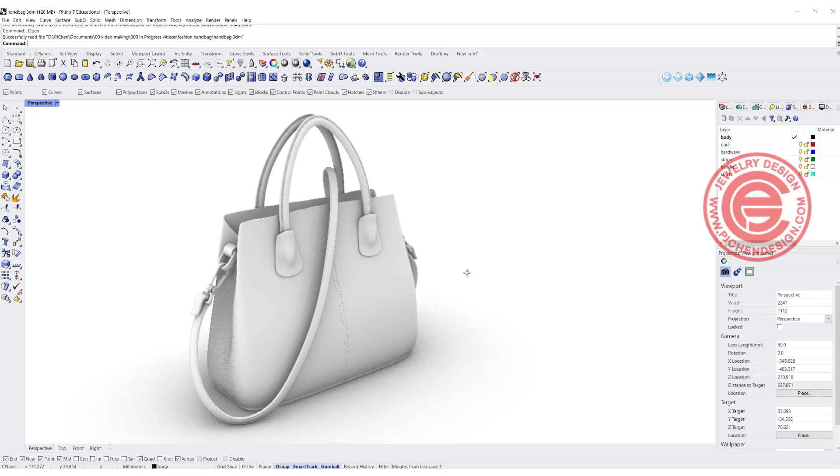This tutorial is going to be too long for one video, so it's going to be a part 1 and part 2. For part 1, today we are going to talk about how to make this main body and how to make this pad to go with it to hold the handle. At the end, we are going to talk about the handle. In the next video, we're gonna talk about this strap and also the hardware to go with it. And finally, we're gonna talk about how to make those stitches.

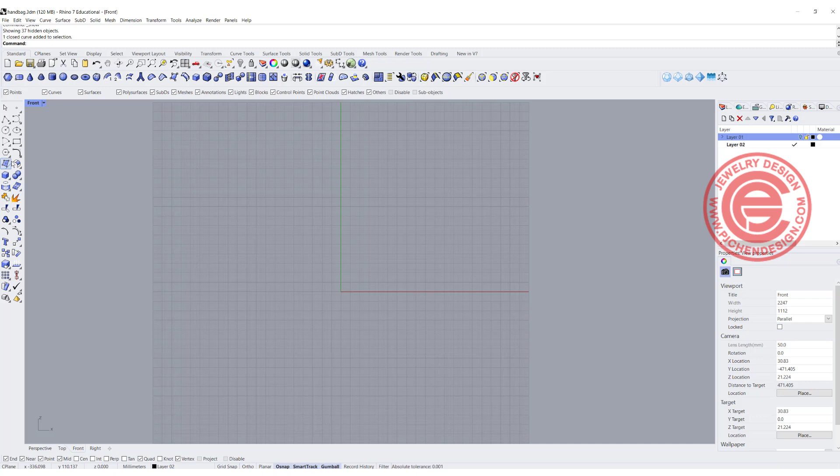So we're starting from scratch. You can design any shape and size that you want. Since this is just for the presentation, for rendering purposes, I don't actually design in the true size, so I'm just roughly going by aesthetic.

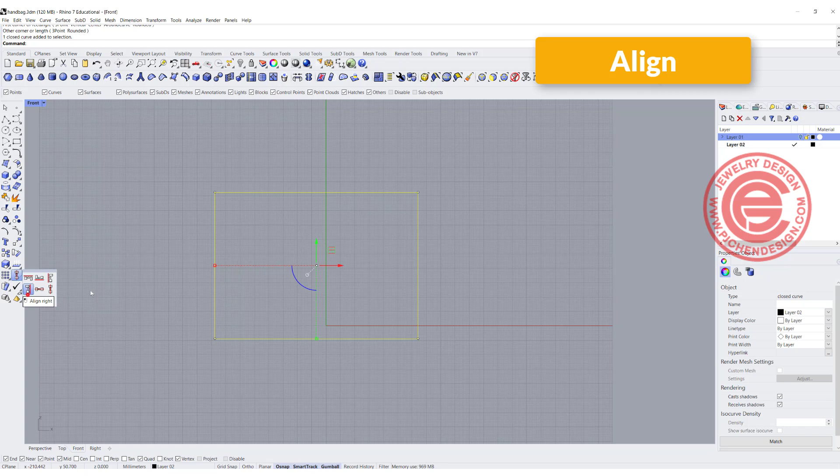Now once I draw roughly the size that I want, I'm going to move them back to the center, and I'm gonna use the align tool to align to the center, and I will have something like this. Okay, so this is roughly the size I'm going to go with. In fact, I want the bottom snapping to 0, so we get something like this.

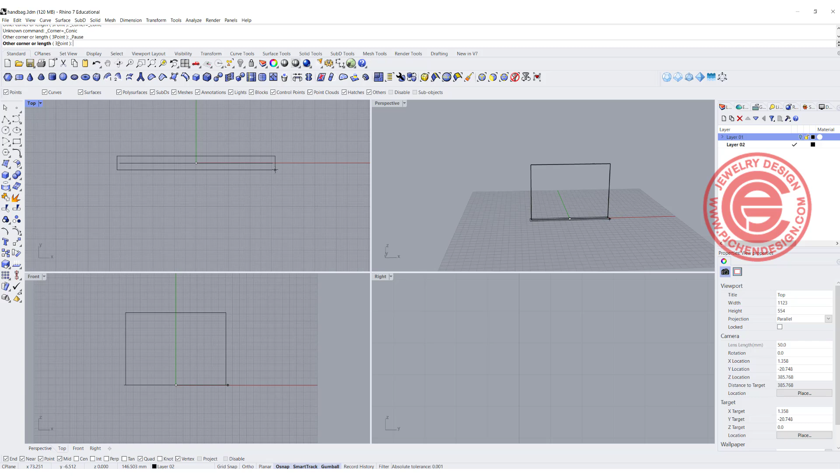Now coming into the top view, I'm going to decide what the bottom of the bag looks like. So I'm going to use the center as 0 and come out, snapping into those points, and come back like this, right? So then this is the bottom of the shape.

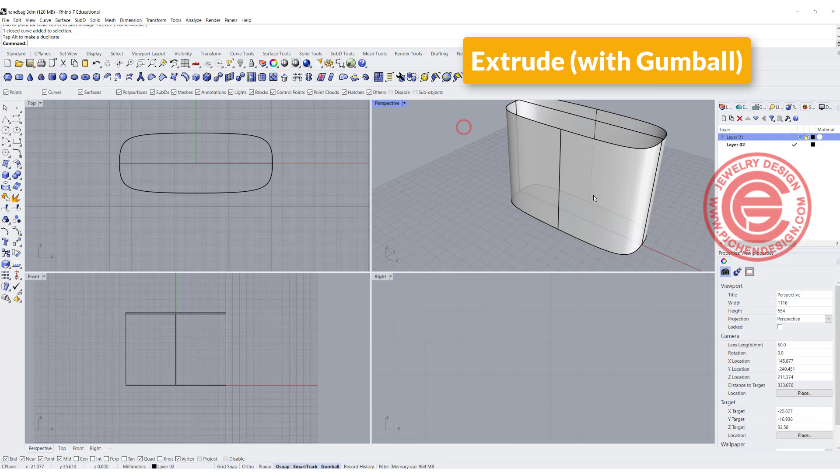Now on the top, I need this one going up, so I'm going to extrude it to whatever I think the height is going to be. So then we'll get this really boxy looking surface. Now with this surface, we need a lot more editing. If you turn on the control points, you're gonna notice that there's not much you can do to edit this box. So the first thing we need to do is rebuild this surface.

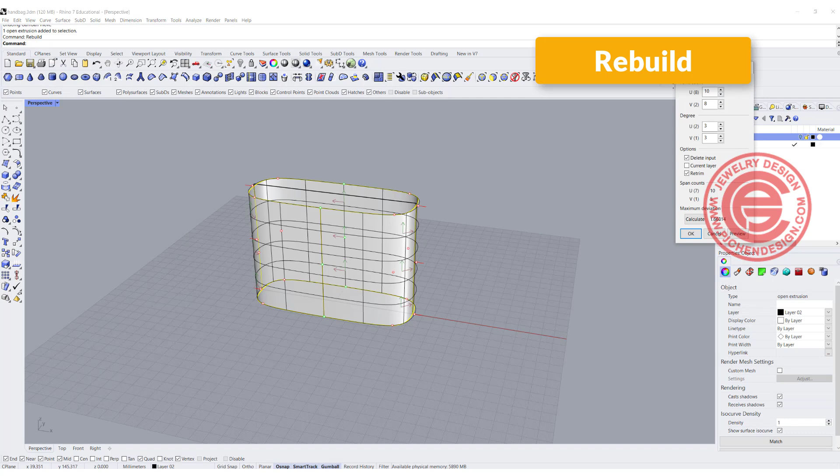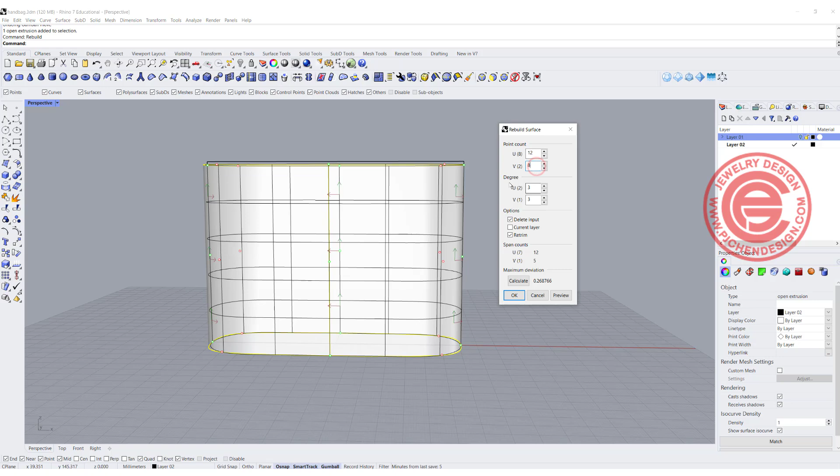How many points you need really depends on what you're looking for. The more points you have, the more control points you can edit later on. So I'm going to keep this as 12 over here, and for the height I actually don't need that many, so 8 will be okay, but the degree must be 3, otherwise you won't get a really good curvature on the side. All right, so now we have this on the body.

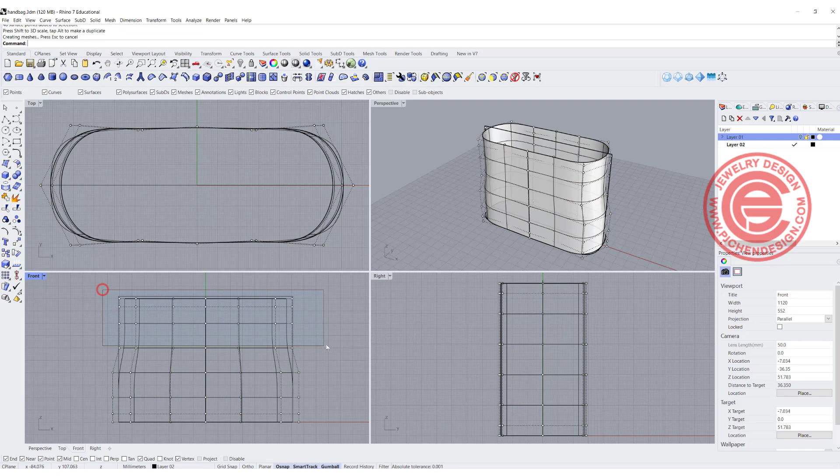I would like to start tweaking them, so let's take a look at all 4 views, and I like to have them in wireframe mode, so it's easier for me to edit. Now I want to start tweaking and moving those back, and if you see what I'm moving, I'm kind of moving row by row like this. And I'm going to delete this one. That was just for reference, and I want them to come back like this. So you tweak it the way that you want. In my front view, I want the bottom to be a little bit fatter.

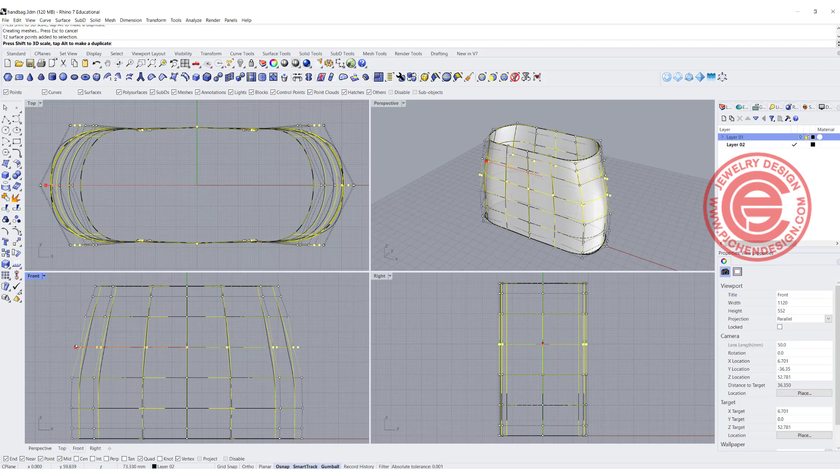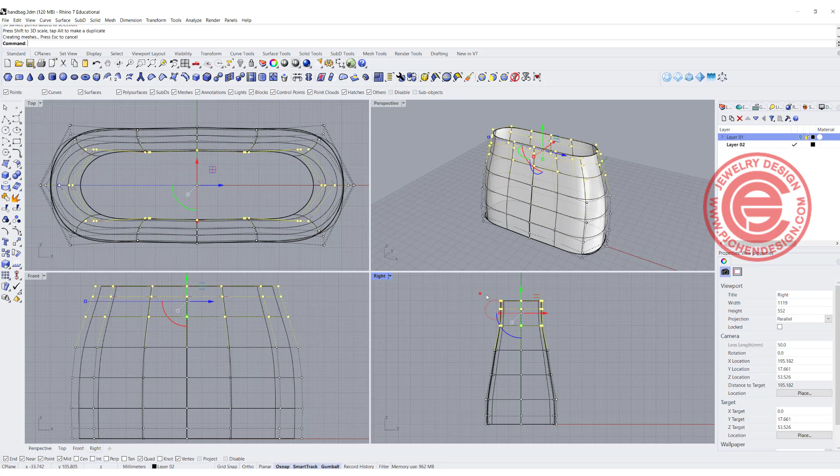And then on the side too, I do want to have those coming in. It doesn't have to be symmetrical, but I usually prefer symmetrical. It just looks nicer, because as human beings we tend to look at things symmetrically anyway. So I like it to move on both sides. And again, you can go back and fine tune it into the shape that you like. Maybe you do not want it to come in that much. So this is something that you can do. So far what I've been doing is just 1D scale.

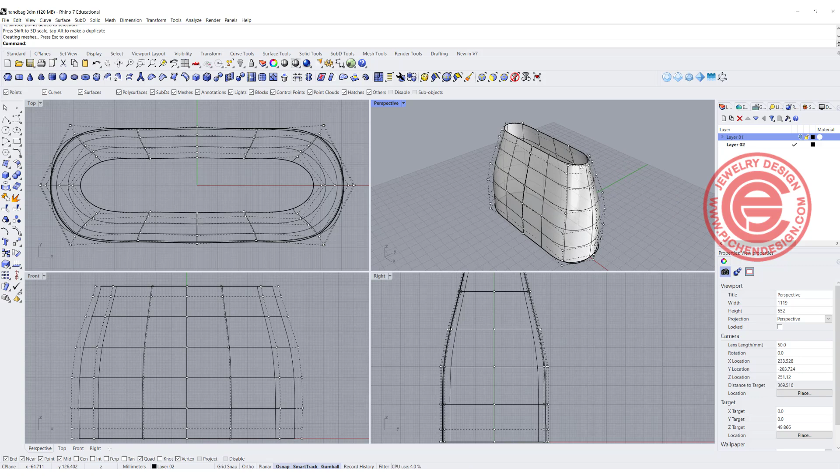All right, so I need to have this kind of caving in here. So let's say I only pick up those 2 and 1D scale in, and all I get is something like this, right? So it's caving there, but I do not want it to move the top in anymore. So I actually need a few lines there to help me. So maybe pull out this just a little bit. I think it's caving way too much.

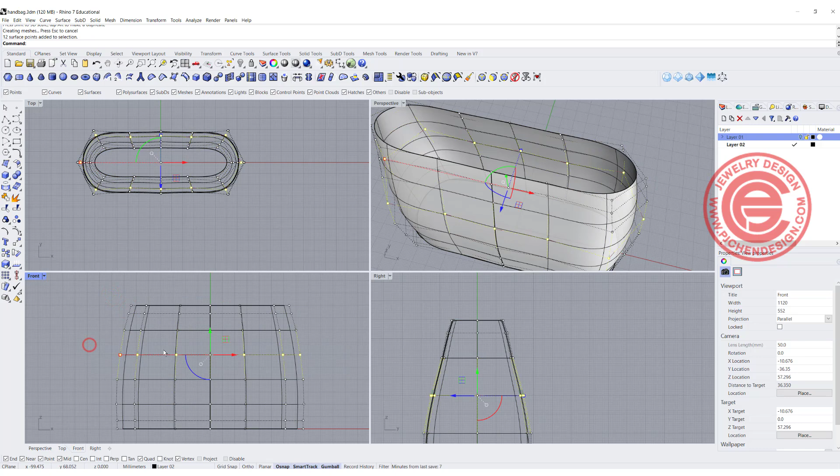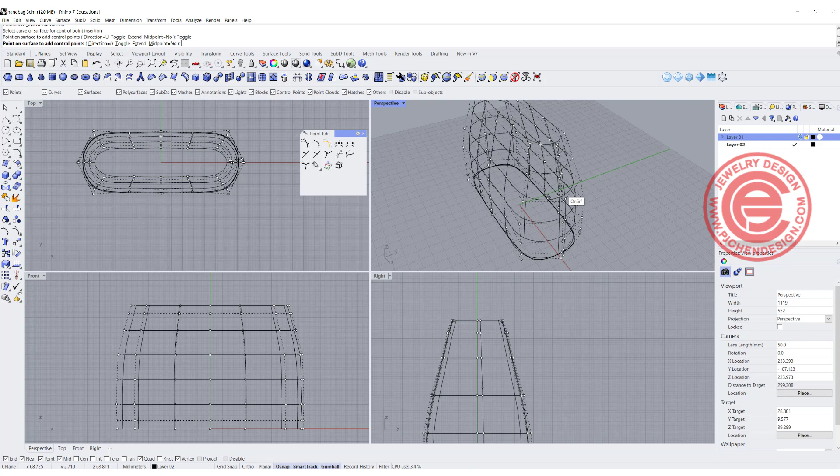And I actually wanted to add some lines there. So let me go ahead and come here for our control point. And you do have this one, it's called Insert a Control Point. So I'm gonna select this surface and I wanted to toggle so they will be right in this direction. And right here I want to add in a line and add another line there. The same thing I wanted to do on the other side, one line here, one line here. So I'm adding that control point there.

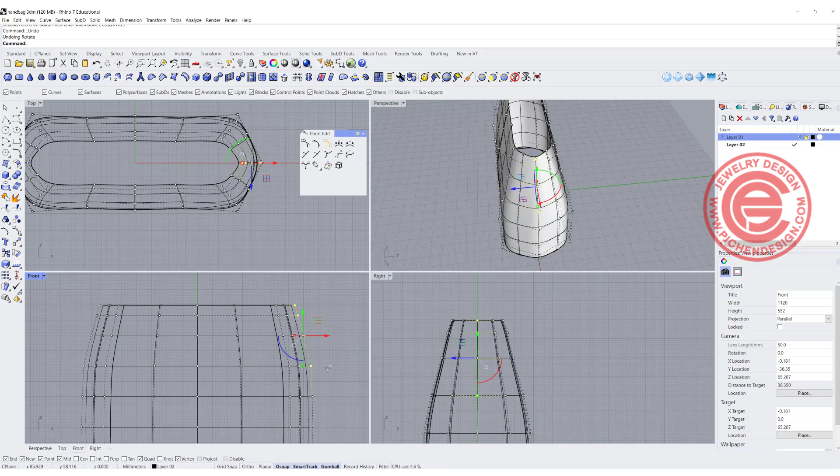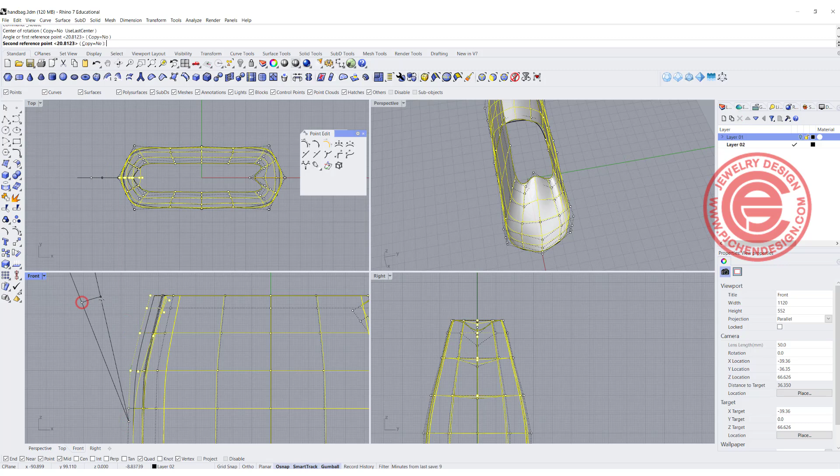Now if I pick up those 3 points on the top and I want to rotate it, coming in like this, you're kind of seeing it's kind of pinched in there, but it's a smoother pinch instead of really big, right? So I'm going to pick up those points here, and again I want to use the rotate tool, and it's kind of a pinch in like that. All right, so then that gives us a little pinch. I mean, it's up to you, you can make them pinch more if you want to.

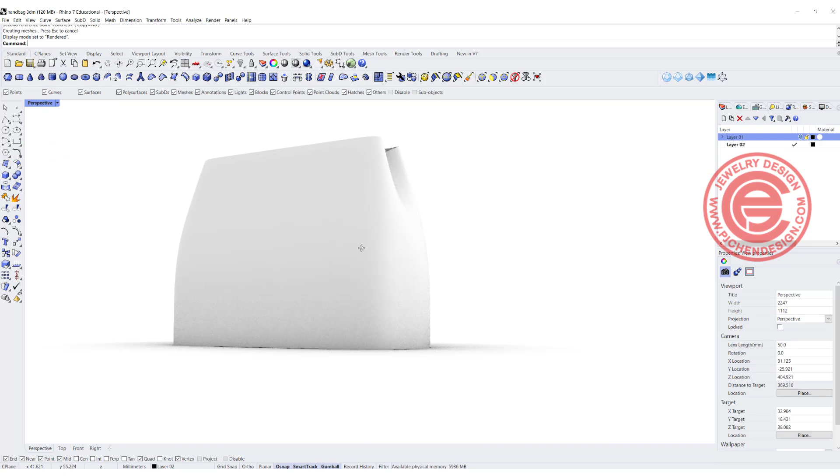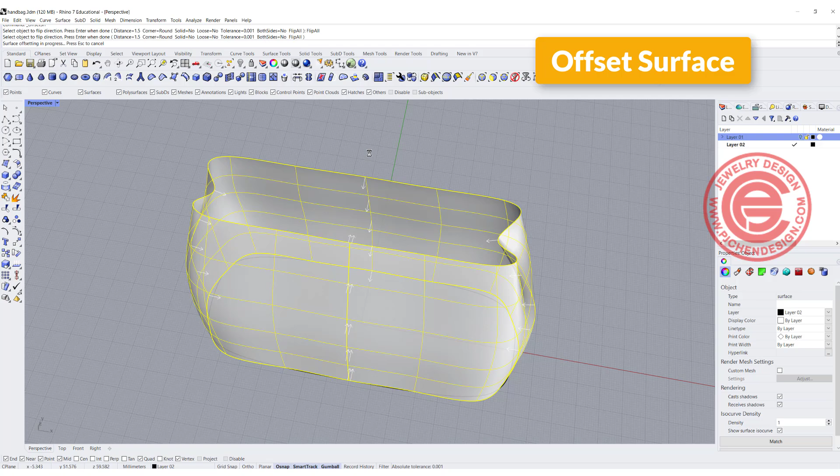All right, so now this is the surface that we have, and it is just a surface. So if you just go ahead and render this, you're going to see it's more like paper thin. It doesn't show the quality of the leather or the thickness on that. So what we want to do is create thickness, and I'm going to use the Offset command. And I'm going to offset inside, so I'm just going to flip it, for 1.5 millimeters or whatever your leather looks like. Now I'm going to go back and do one more time.

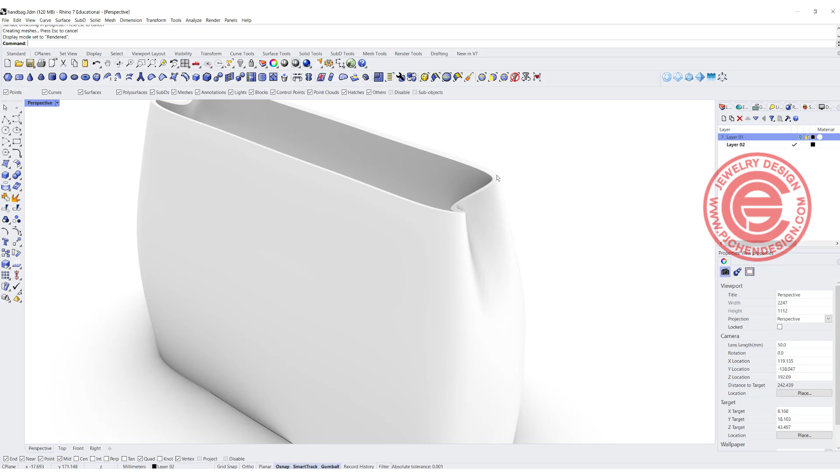If I use Solid=Yes, I can get this solid there, but it doesn't look too good whenever you are doing the rendering. It is a soft good, and with any soft goods, having a hard edge just doesn't make sense. One thing that you can do is give it a really small fillet. Let's say we're gonna do 0.35, and you can soften the edges of this, and that should give you something rounded. If that works for you, that's fine.

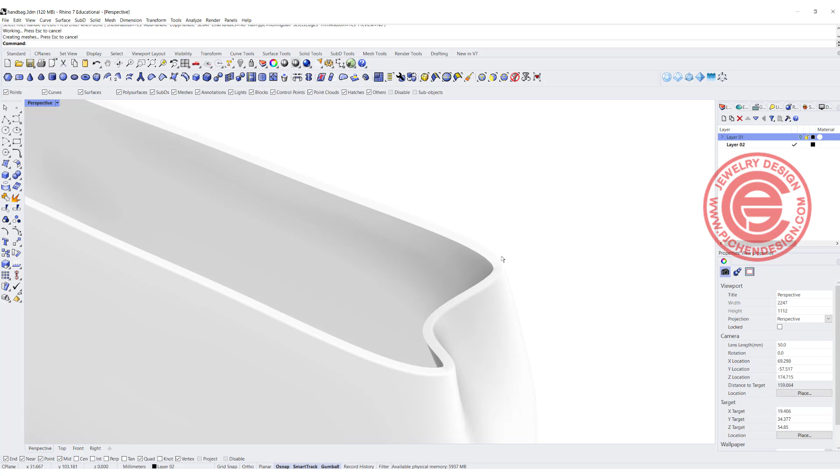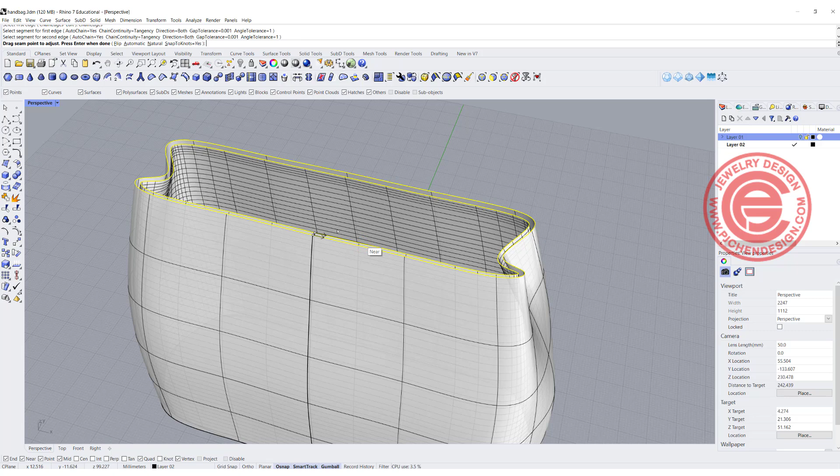But what I would like to do is do the offset the same way, and we're gonna offset the surface and flip it inside as well, and Solid=No. So then I will get something like this. Once I get this, I'm going to use the surface command Blend Surface, and AutoChain=Yes. I want to have this one and this one, and we'll blend it together, and it doesn't have to be so bumpy like this, coming down like this, and we can join this. We'll join those 3 surfaces together, and let's check the render view one more time, and you can see it's much nicer. It looks really soft there.

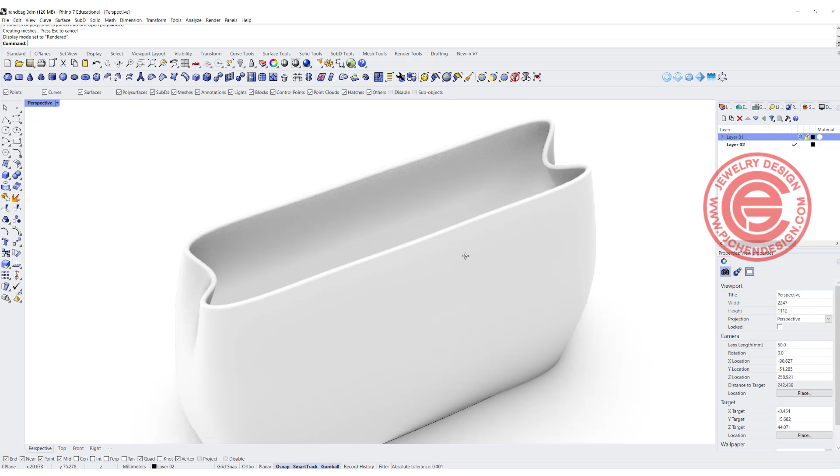All right, so this is the trick that I like to use. Instead of Solid=Yes on the offset surface, I like to use Solid=No, and then blend the surfaces together. All right, so then that's one.

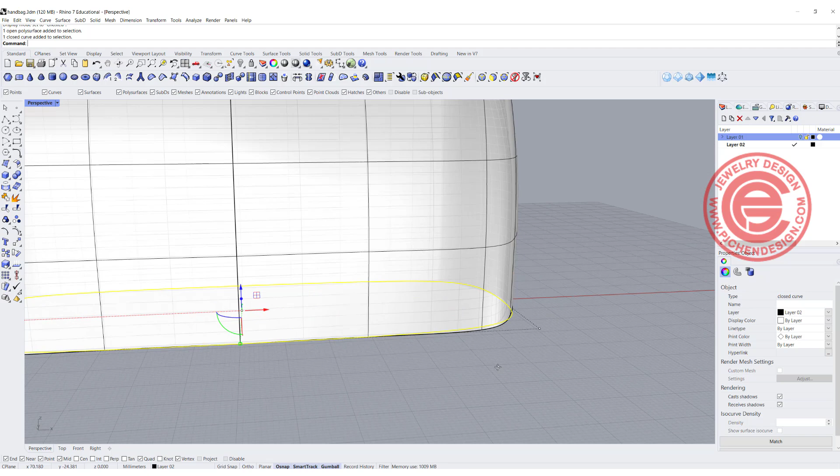Now let's take a look at the bottom. Since we changed the surface, it no longer follows our original curve there. So I no longer want to use this one. And by the way, we have this opening there. So I'm simply just going to loft in between here to here, kind of giving whatever surface there to close it. We don't actually print this one, so even if you don't close it, that's fine.

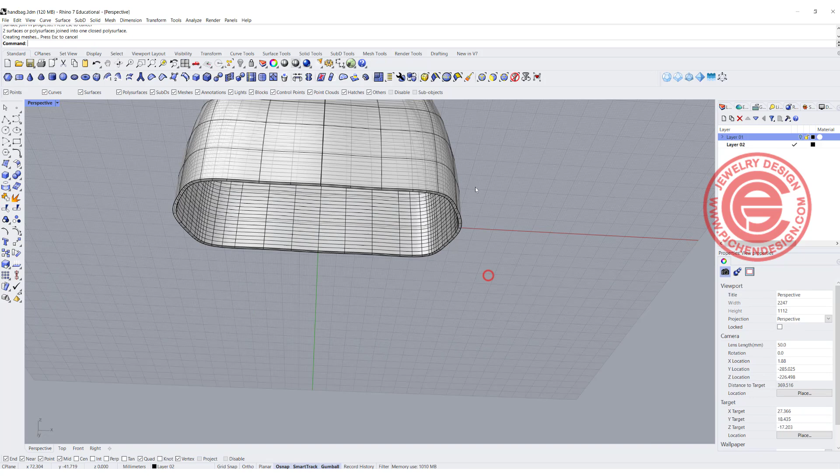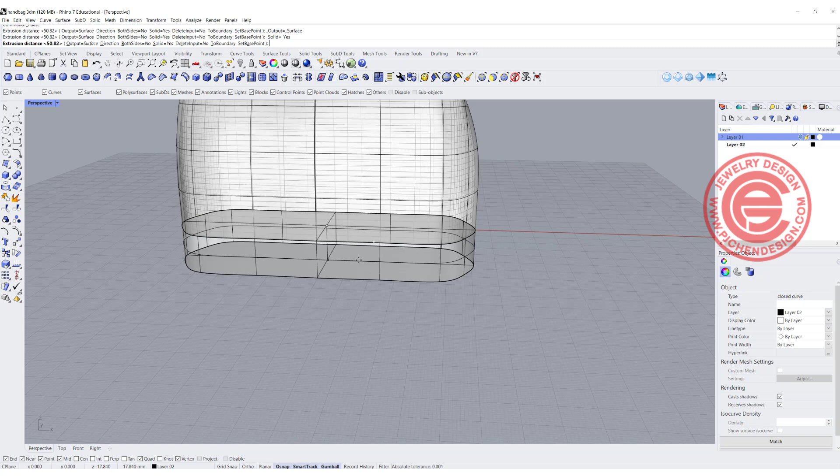So we're going to duplicate the edges for this one, and then we're gonna use that to make it into a solid by ExtrudeCrv planar straight, and I'm gonna have it going down maybe 2.5 millimeters, to have something like this.

All right, if you look at the render view, because it is extruded from the edges, it feels like it's nothing unless you separate them into 2 different materials. Any of the connections on the material, I always like to fillet the edges. So what we can do is fillet edges and make sure chain edge is equal.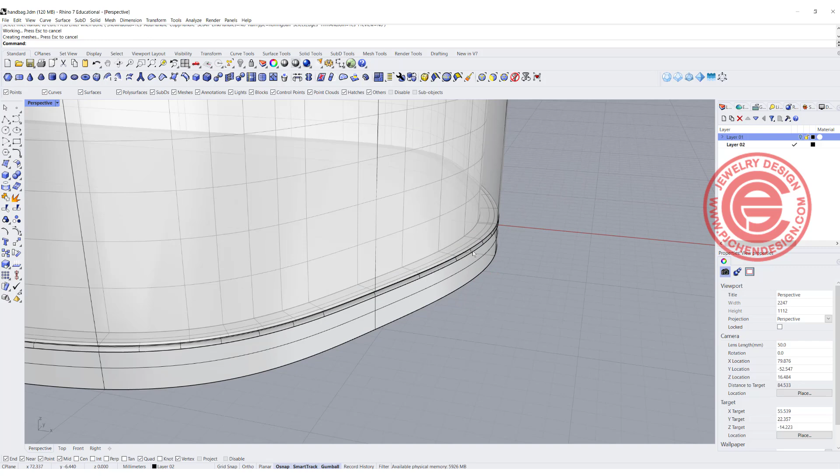Chain edge is there, and we want this one. And we also need this one over there. The render will look nicer, and also the one on the bottom. So then if you look at the render view, you're going to see the separation of the bag. All right, let's go back one step.

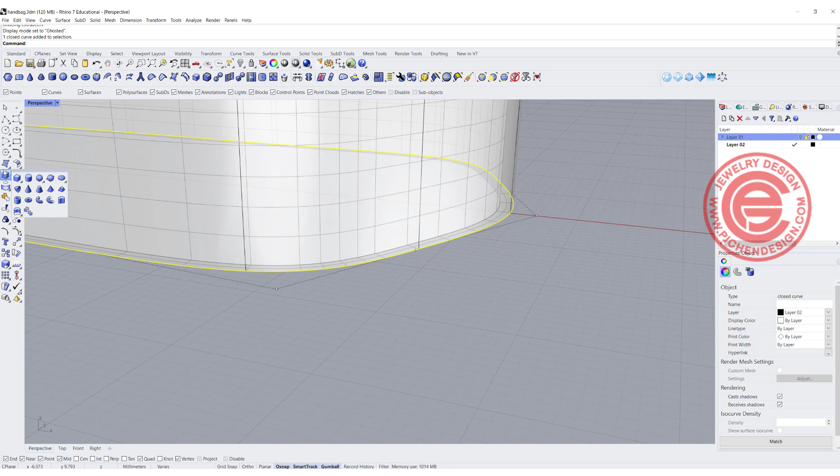And if you don't like that way, another thing that we can do is we can make this one into the surface first by using a surface from planar curve. Right, and once you get this surface, we want to create another surface by moving it down like this, and again, we can use the blend surface.

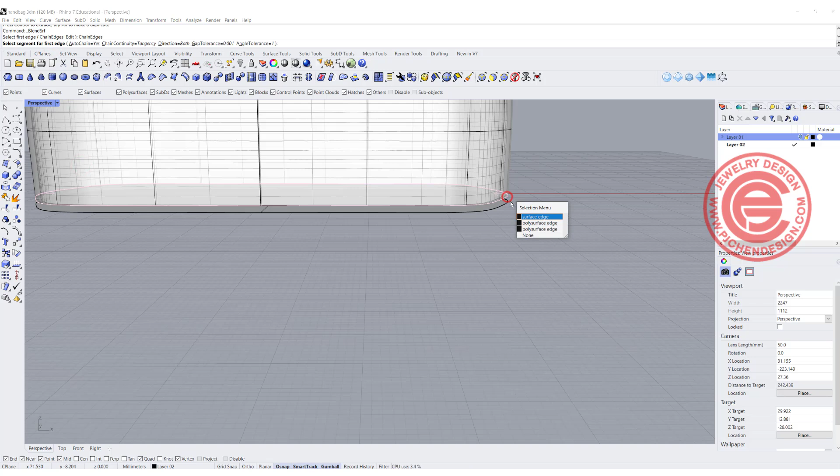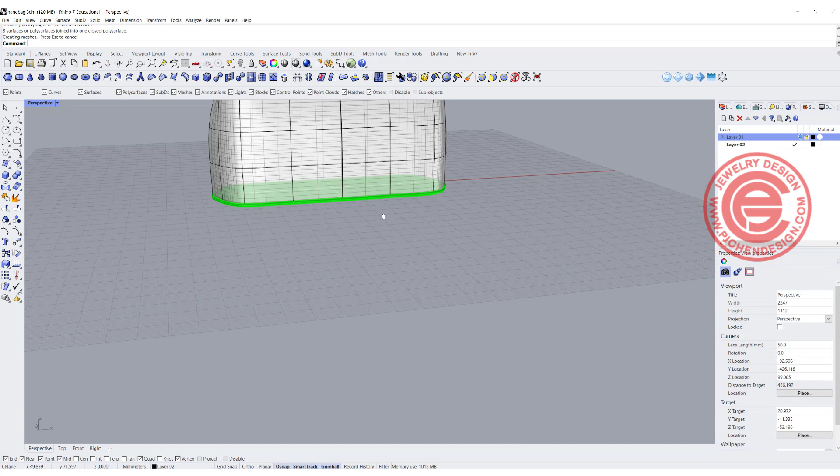Make sure chain edge is equal. Yes, we want to blend from this one to this one. And we don't need that bump there. So it's the same trick that you used to create this piece there. So let's go ahead and join all of them. And I would like to assign them a different color, so that way you know what I'm doing. Okay, so now we got this.

We can start working on this handle holder. I don't know the exact name there. If you are a bag designer, maybe you can tell me what that little piece to hold the handle is. So what I like to do is create a straight line right there, and I'm just going to mirror it to whatever distance, and I can move it in or out if I feel like it's too much, right?

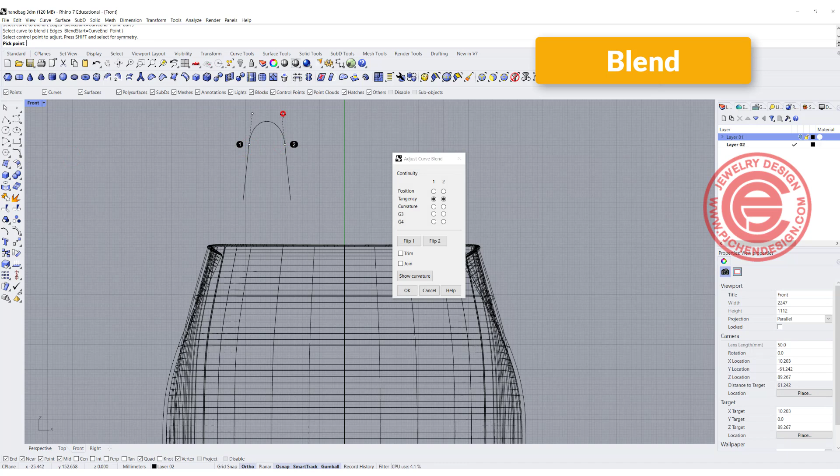So now I have these two straight lines and tilt them a little bit, and I can blend between here and here. And I want to move it down by holding shift so I can move both of them at the same time. And I click OK. Let's blend one more time here and here, and holding shift, moving back at the same time, and click OK. So now we can join this.

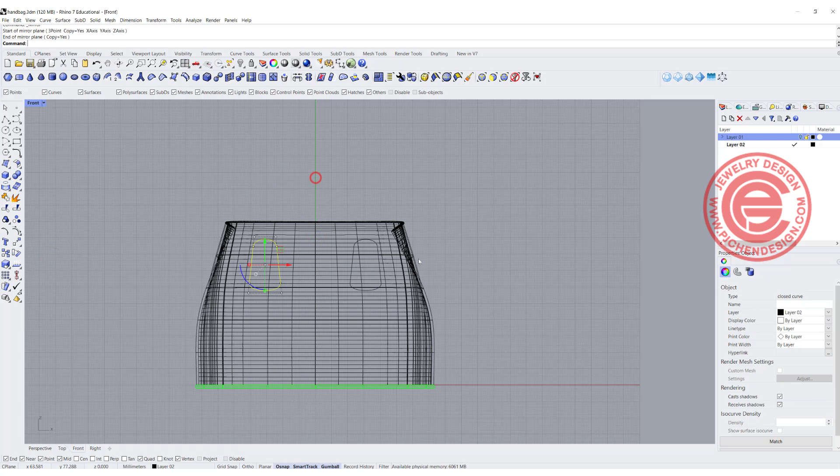Okay, so once I have it, I'm going to move it to where I think this piece is going to be. And then we are going to mirror it to the other side like this. So this is where that piece is going to be. Maybe I should have just tilted them a little bit. So let me do the mirror one more time to see if that is the place that I want. So let's go ahead and mirror something like this.

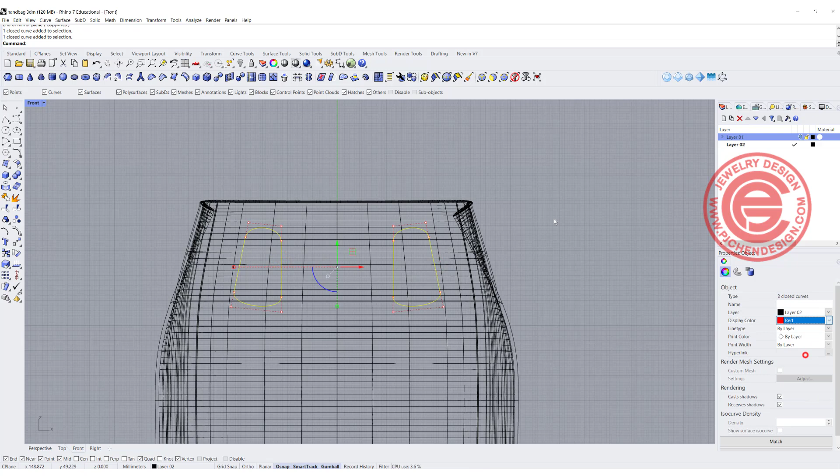So you see this line and this line, and I'm going to turn it red so it's easier for you to see. Okay, so this is the place that's going to hold my handle. If that is the case, my handle is going to be somewhere about here and here, and going up like this. And then I can rebuild this guy.

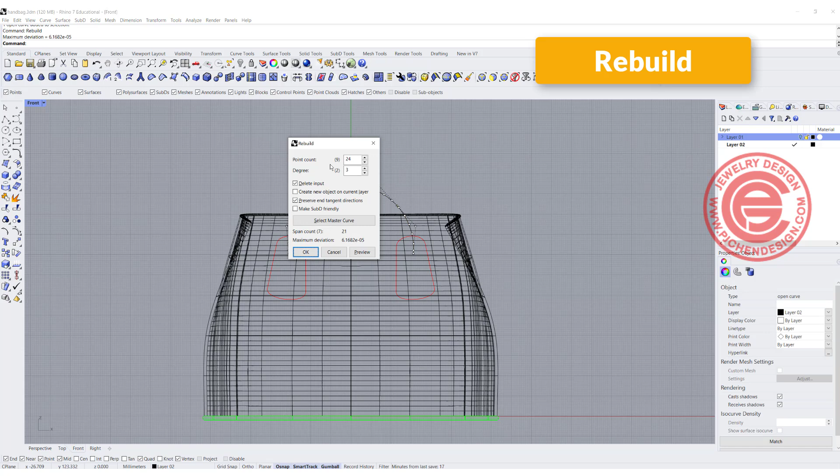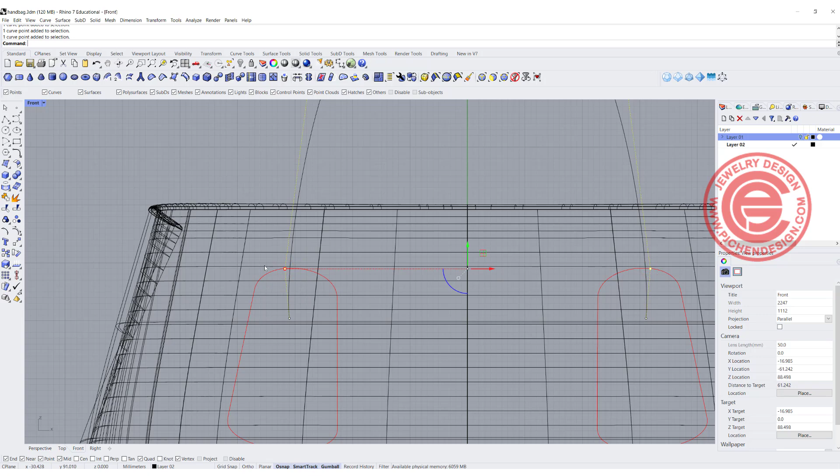There are too many points there, so I may just want to have 7 points, and I want to bring those points up, kind of proportionally, to see if that is the place that I want for my handle, if that pad is big enough to hold the handle there. So I kind of want to see the curve first.

Alright, so if that looks alright to you, we actually need to create this surface. However, we've been tweaking this piece, so the surface is no longer straight. Anything that we use this curve to create the surface with won't fit the surface, right? So we just want to use the handbag itself. Let's go ahead and Control C and Control V. So now I have two bags there as a body.

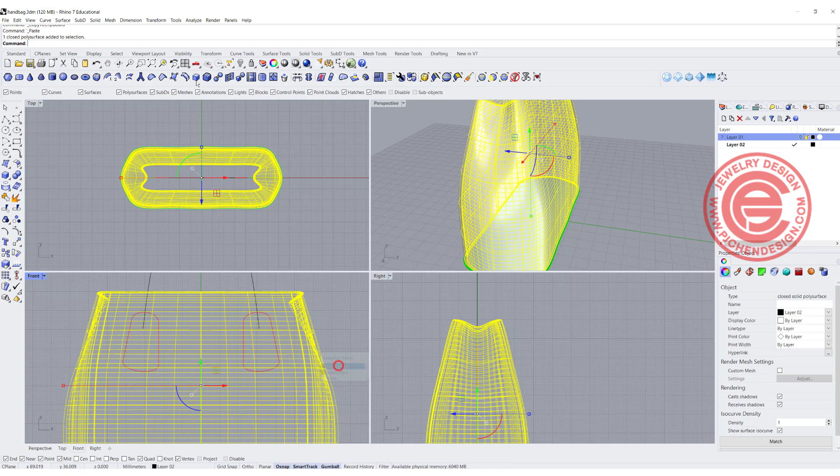Let me hide one of them, and we are simply going to pick up this one and trim the rest of it. So now we have the pad there. We only need the outside one, so the inside one we actually don't need, and I'm going to delete a bunch of them there.

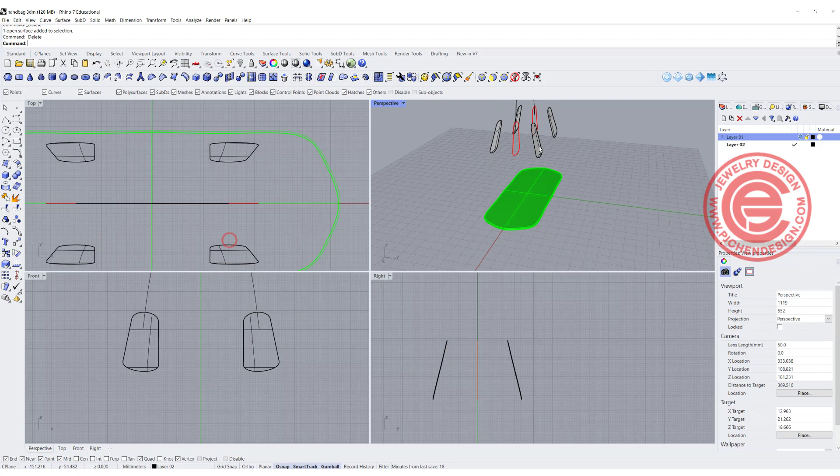So we don't need this one, this one. Those are the 4 pieces we need. Let me change it into the color for the red one. Okay, so now if we have any of the handle, this piece is not going to hold it, right? First of all, it doesn't have the thickness, it's completely attached there. Second, we need to have some sort of opening on the top so the handle can insert and sew it

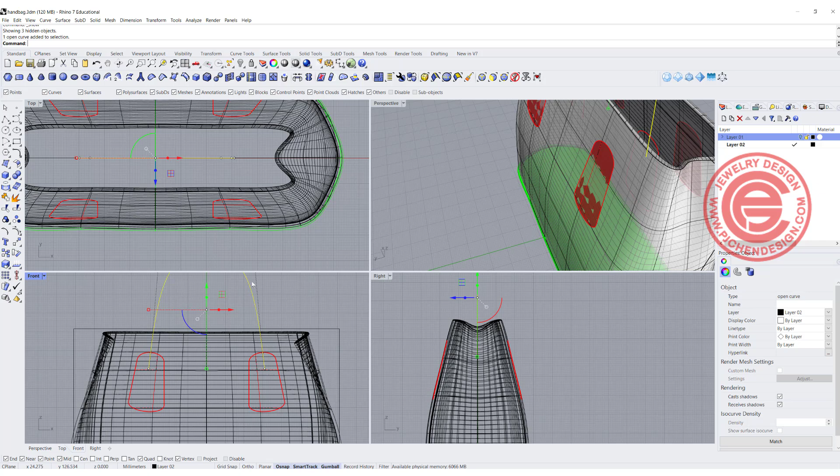inside. All right, so if that is the case, let's work on the handle first to know where these pieces should be. So my handle is going to look something like this. It's going to start from here, coming up, maybe like this, going straight like this, and coming more like this way. All right, so then I have a curve there. Make sure that curve is straight.

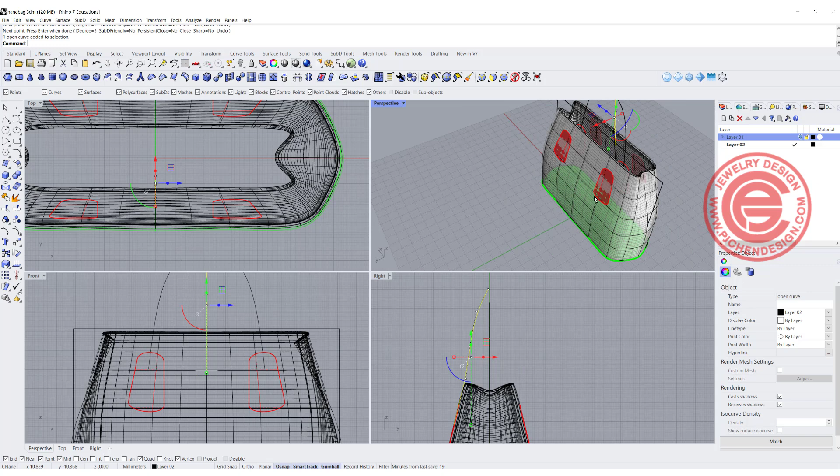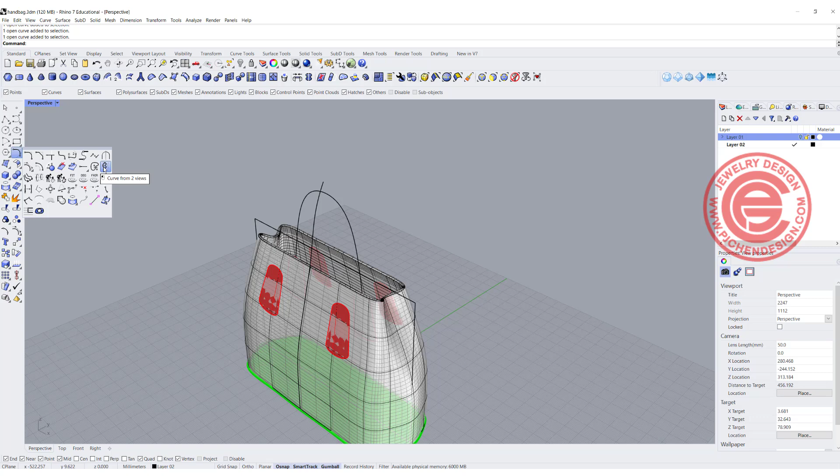All right, now I have this curve and also have this curve, and what I would like to have is this arc but following the profile of this curve, right? How am I going to do that? Let's try the command curve from 2 views, because we have view 1, we have view 2. We are going to create a curve in between this guy and this guy. So now you can see this one, I'm going to turn it into the cyan color. This one is actually fitting in there really nicely.

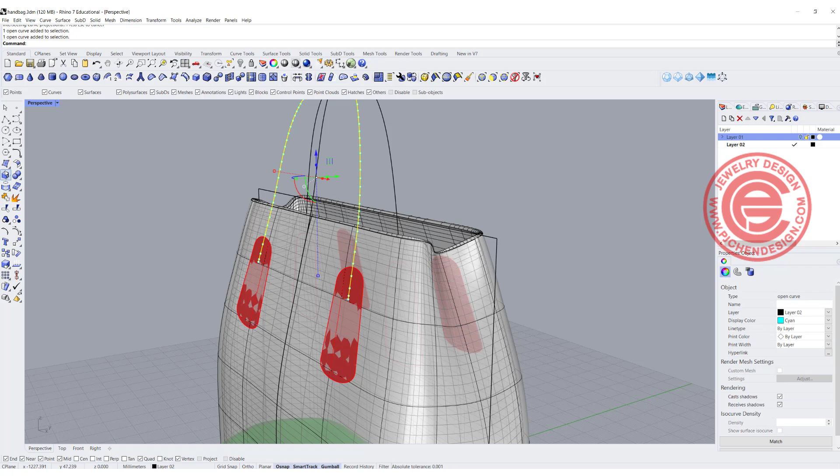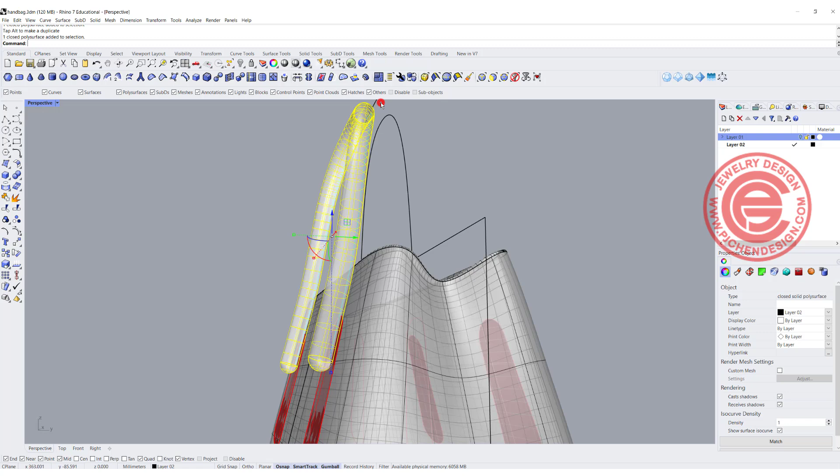If I simply just pipe this one, for example, with something really small, then you can see the handle is possibly going to be there. I can kind of move it out just a little bit. It will still fit in there. Now, if that is the handle, which we are not going to use, we're going to alter it. This is just here for the placement. We need to make sure that this piece can compensate the height for this handle, right?

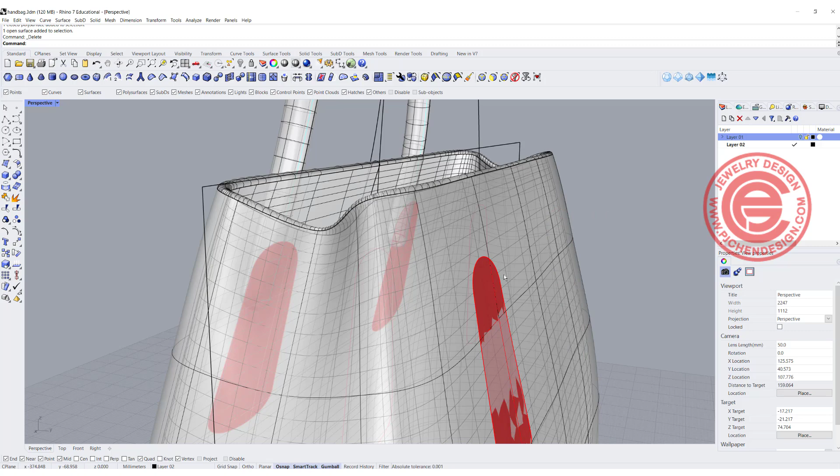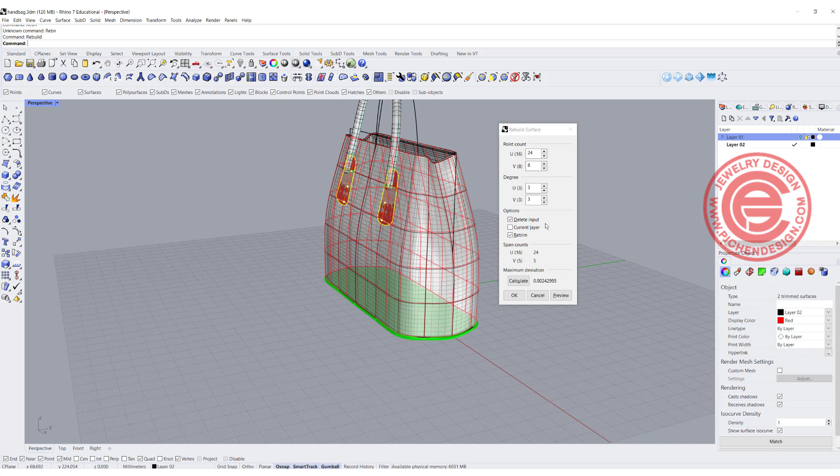So what I like to do is I'm going to pick up all these pieces, and we actually just need to make two of them because those two are symmetrical. So I'm just going to delete those. All right, those two pieces right here, this little piece and this little piece. If I type in rebuild, this is what you are going to see. Even though I want to rebuild a lot, I say 24, you're going to see it is rebuilt with the points for the original surface. Why? Because when I turn on the whole thing, my control points stick on everywhere, right? And not many points fall into those two little patches to do the edit.

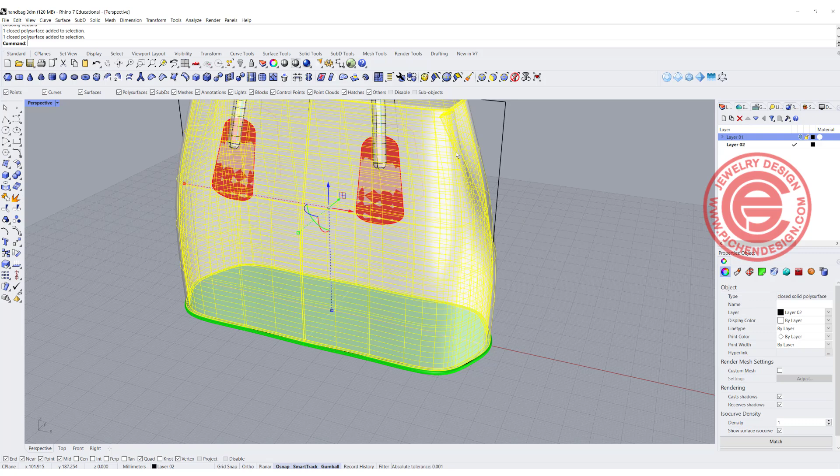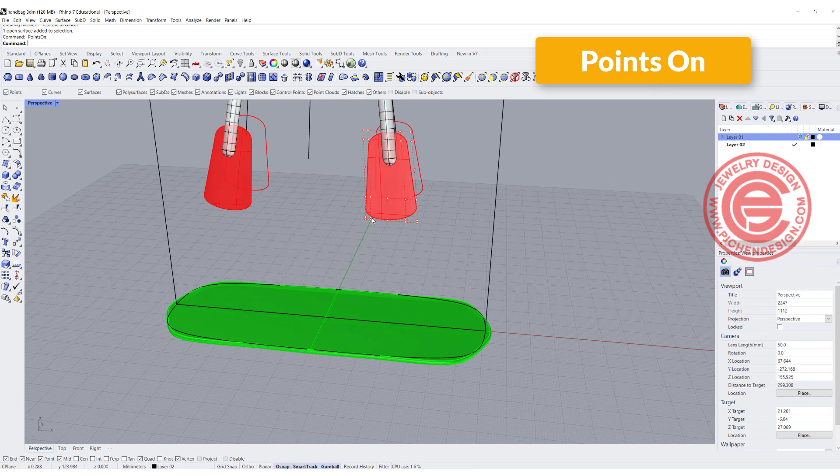So let me do it one more time. Let's do one by one, and let me hide this guy here. So the first thing you want to try, instead of a rebuild, is ShrinkTrimmedSrf. Once you hit that, it feels like nothing happened, right? But if you turn on the control points, you can see the control points are close to the border of this piece. By comparison, this guy, if I turn on the control points, you can see it's still keeping the original handbag there, right? So you need to make sure that you do ShrinkTrimmedSrf. And we want ShrinkTrimmedSrf on that piece as well. All right, so now we have that.

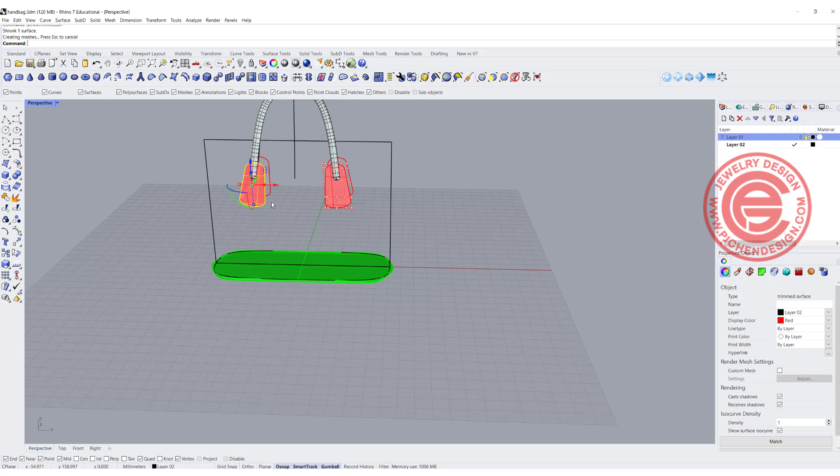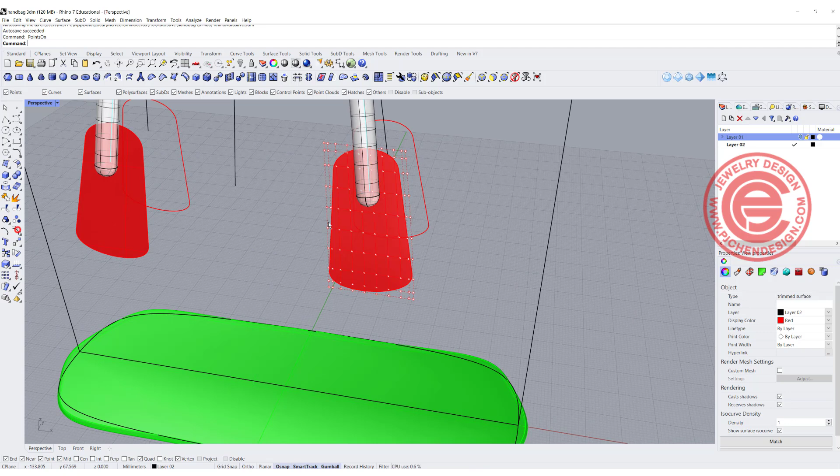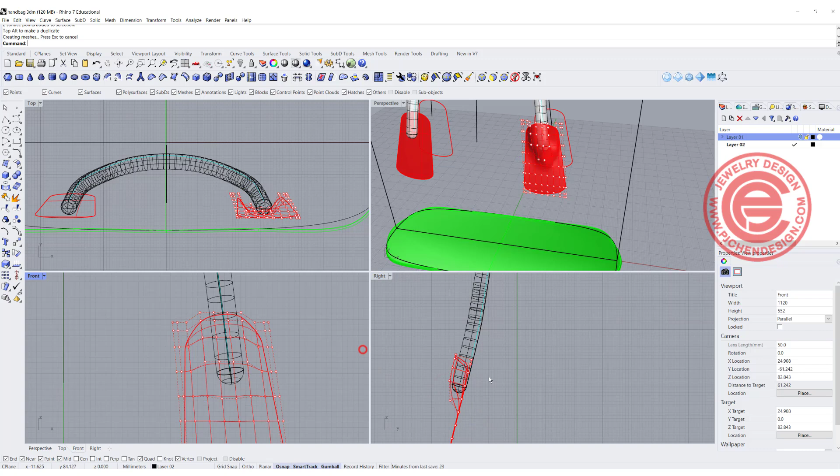The second thing is we can go ahead and rebuild this guy. Now, if we rebuild this guy, we want to have about 10 points, and on the height I want to have 10 as well. So then I will get something like this. If we turn on the control points, then we can say, okay, maybe right at this spot right here, I want them to come out, and maybe those two need to come out a little bit too, so you can kind of see it cover our design right there.

So maybe right at this point and this point, it comes out a little bit too much there, so I want them to come back a little bit.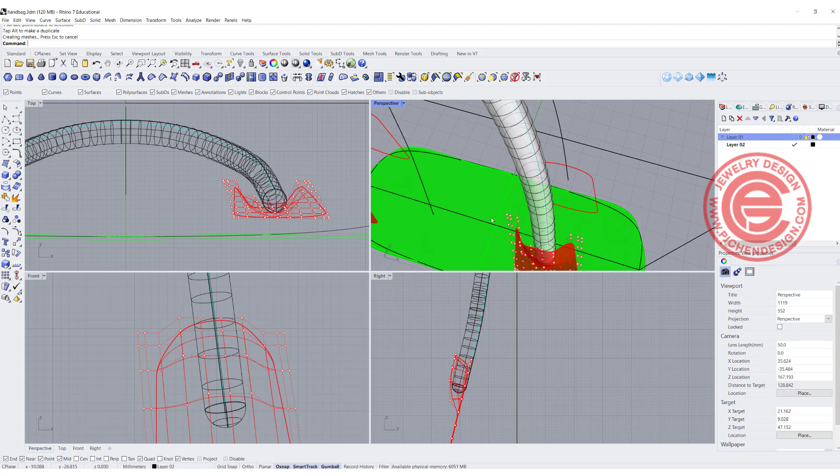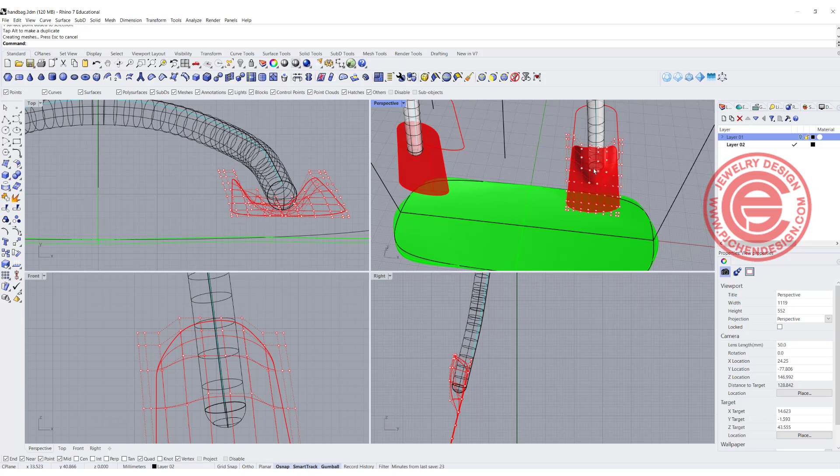And you kind of fine tune it because it's kind of flat there. Maybe I want to pick up the one in the center and just move it up a little bit, like this one moving up a little bit, to fine tune it, something like that. It looks more natural, right? So it's up to you, depends on how big this handle is gonna end up with, right.

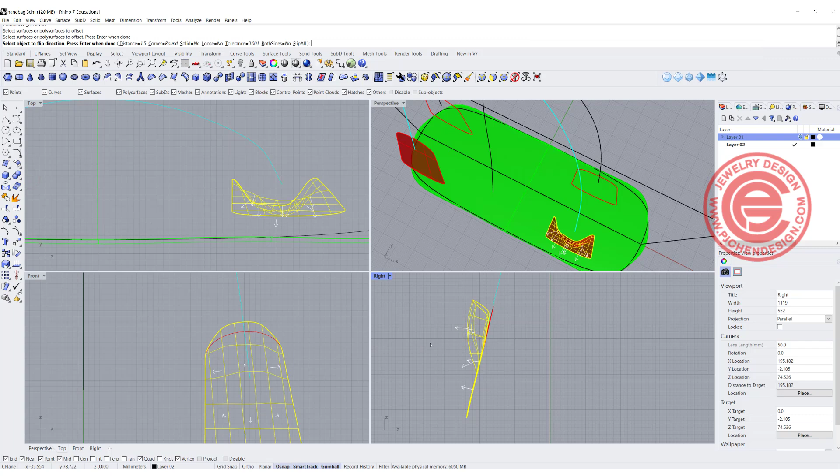So once you have it, I'm going to offset this one again, offset the surface, and we want to offset this way, for 1.5 solid equal no, and we'll get something like this. That gives us the thickness of this piece, and then we can just blend it. The surface, make sure the chain edge is equal. We're gonna pick up here and here, and then it's way too bumpy there, so move it back a little bit and click OK.

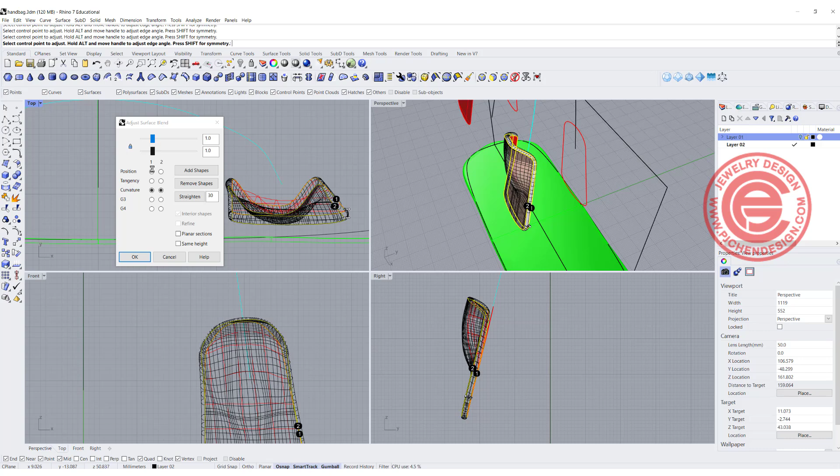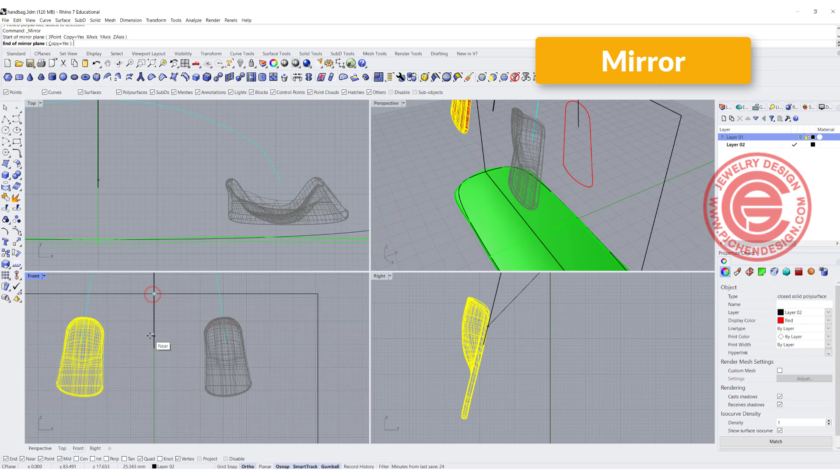So then that will be the piece holding your handle there. Let's go ahead and join it. Once it is joined, because it's symmetrical, I'm going to simply mirror from here to here, and again from here to the other side. That's turning back the handbag, and this is how we get for this.

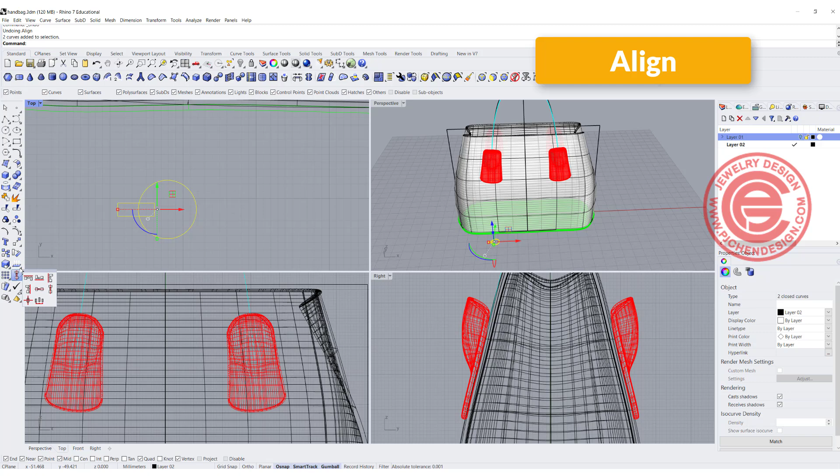The last thing is for the handle, and we can sweep something over there if you want to. Let's say I'm going to create some sort of a pipe looking thing for my handle, and I also like to create something like that. I want to align it horizontally first and trim each other.

And join them. All right, and then I want to give it a little bit of corner, so maybe let's go ahead and fillet a corner. The radius, let's try 0.5, and we're gonna have here and here smaller, having a little radius. Anything with the little radius always looks nicer.

All right, so why am I picking this shape? It's because a lot of the time when you have a leather handle, you got something in the middle. Let's say you have some sort of plastic or harder material, and your leather is actually wrapping around it, right? Once you wrap around, you're gonna sew it together. This is the spot where we are going to have stitches, right? And then you always have that little thing coming out. Okay, so I want to get the shape to at least look like that.

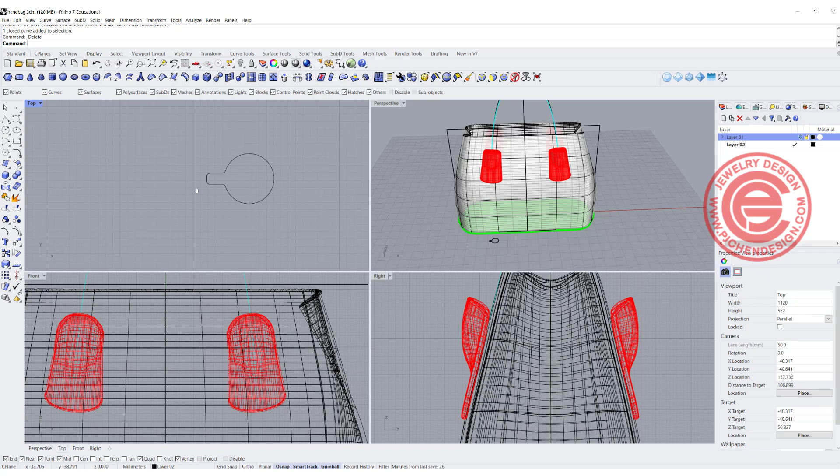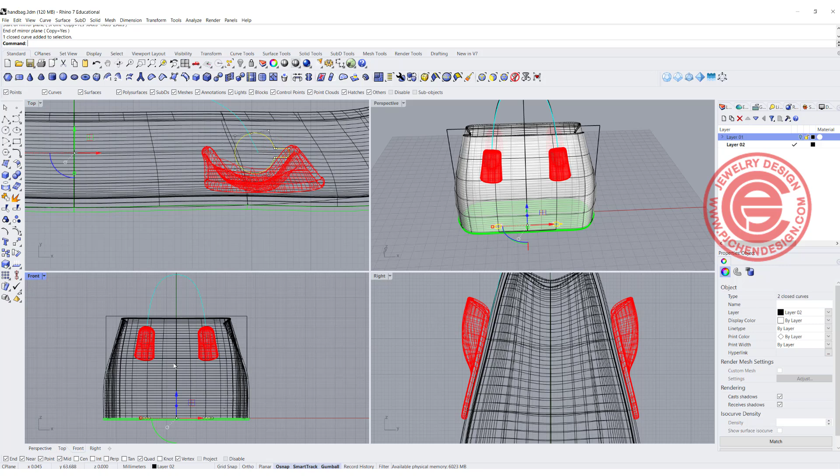And then, I think a handle might be too big. I'm going to move this handle close to the center there and mirror to the other side. And for those two shapes right there, it's not in the right place because it's sticking to the bottom. So I want to move it in my front view, get it really close to where the handle starts, right? So let me hide everybody so you know what I've been doing there.

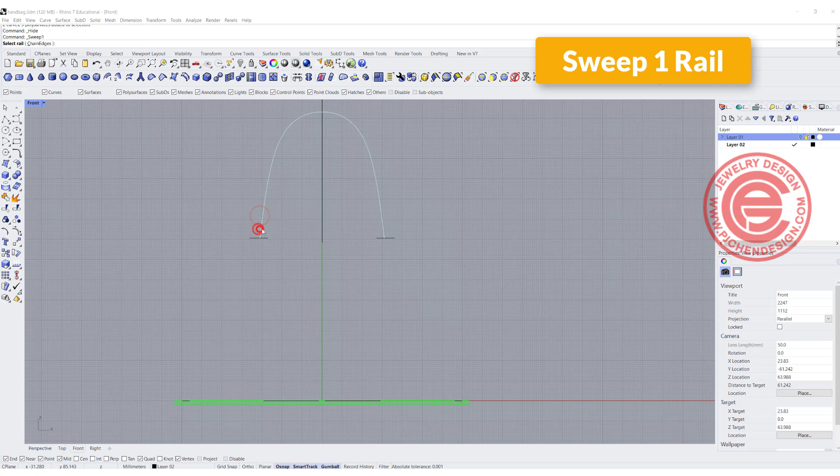And let's give it a try. We wanted to do the sweep one rail, and you got this rail, and you got cross section 1 and 2. Then that's how we get this handle there, right?

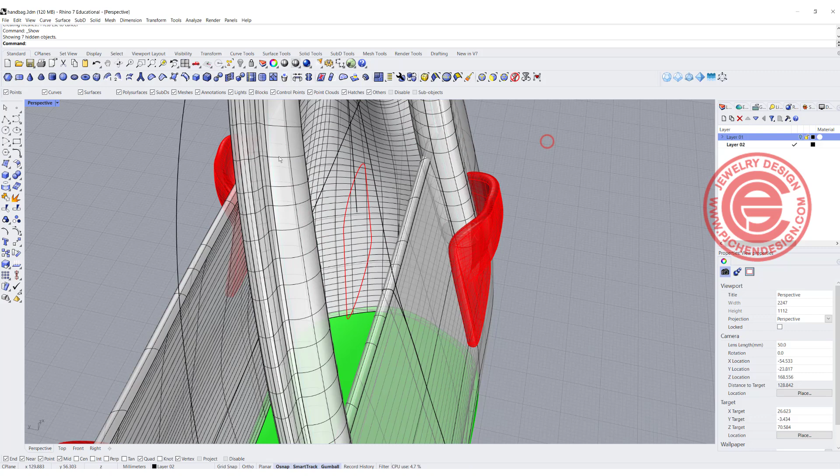Let's turn on everything back and see if that's fitting in there nicely. Now it might cut into the back there too much, so I also have a little bit of space there, so I'm going to move it out like this, so it feels like this thing is in there. You can make this touching much better, you just need to go back and adjust that surface.

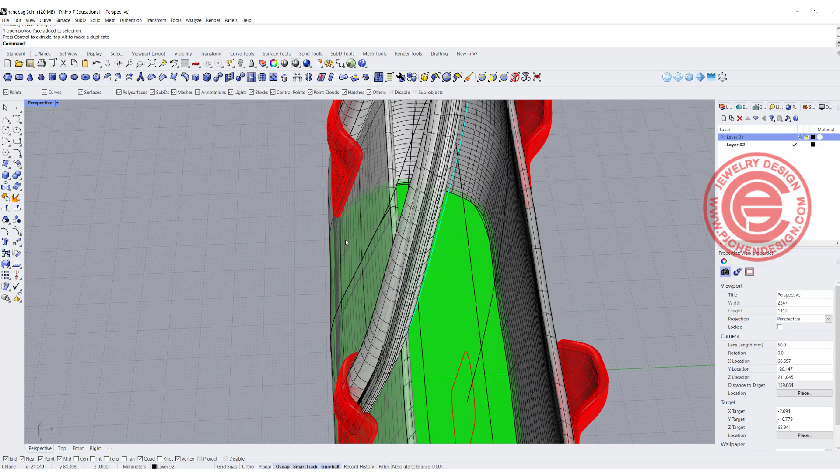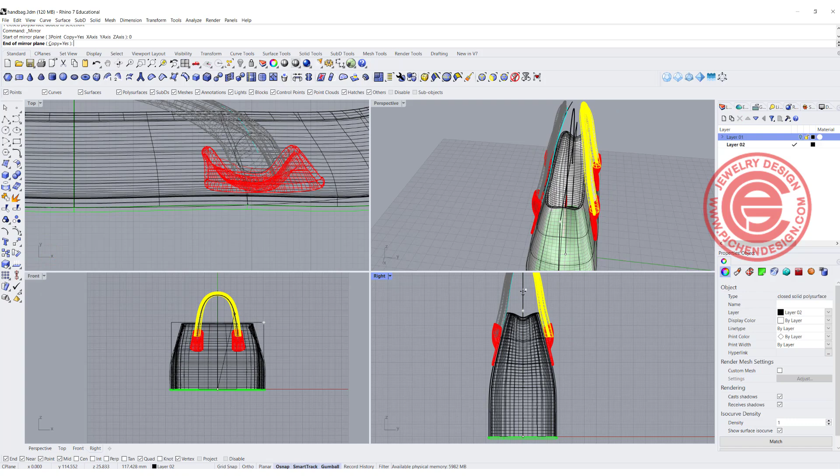All right, so if you like that, you can go ahead and cap it. Even though we don't print it, I also always like to make it as solid as possible, just in case I want to do something about it, right? All we need to do is mirror to the other side. And then we have a basic shape done.